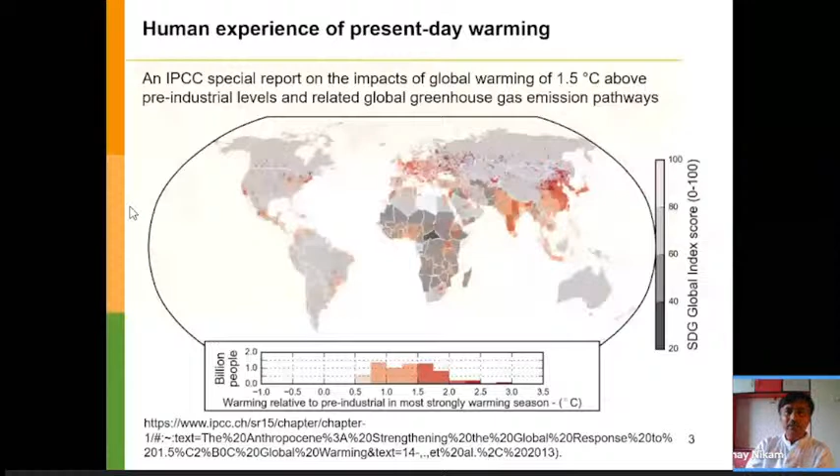So, in a nutshell, there is an increase in temperature because of global warming by 1.5 degrees Celsius, right? And this is an evaluation over the years from 1860 to 2020. Over a period of time the temperature is increasing because of greenhouse gas emissions. So, what are the possible mechanisms for urban-induced rainfall modifications? Because of climate change, we have witnessed an increased number of high intensity rainfall events. So why is this happening?

One is atmospheric destabilization through enhanced low level heating, commonly known as the urban heat island effect, which is prominently observed in urban areas and adjoining areas. Then increased low level convergence due to surface roughness, the modification of microphysical and dynamic processes, the modification of low level atmospheric moisture content, and pollution from automobiles and industry.

Even if you take the case of Mumbai, India, we have frequently seen cyclones happening on the east coast. Cyclones happen most prominently on the east coast. But now, for the last 2 years, we have seen cyclones happening even on the west coast. This is mainly because of climate change, because of the

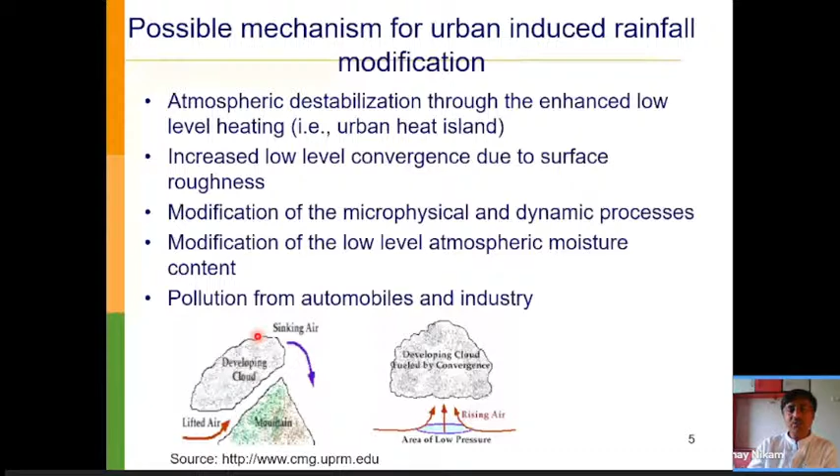rainfall effect, and because of the urban heat island effect, high intensity rainfall has been observed not only in the city area but in areas adjoining the cities. Now, what is happening because of the urban heat island effect? Earlier there was a huge difference between day and night temperatures, maybe in the tune of 5, 7 or 8 degrees. Now the difference has been getting reduced because of the urban heat island effect.

I've done some studies where I've checked the Mumbai temperature and the Delhi temperature. We have seen that the earlier difference was 8 degrees Celsius. Now it is only 4 degrees Celsius. That's why we feel very uncomfortable even at 10 p.m., 11 p.m., 12 p.m. in the night. After 12 p.m. the difference increases, but up to 12 p.m. the difference between day and night temperatures is much less. That's why we feel a very uncomfortable scenario. Same is the case of Shanghai.

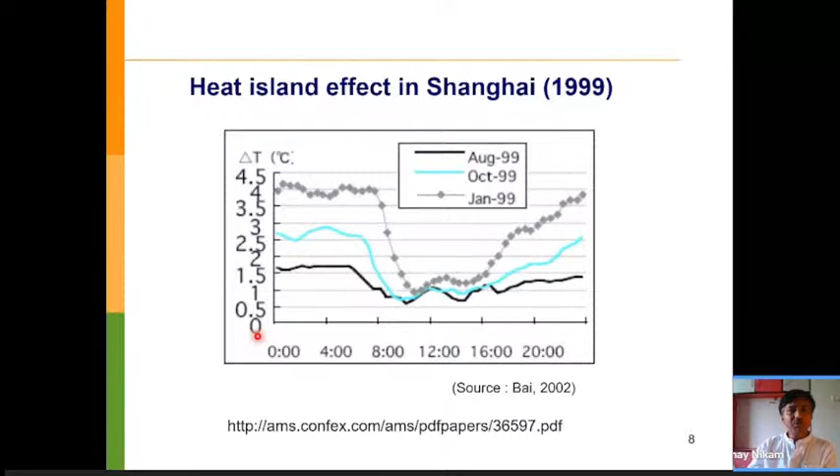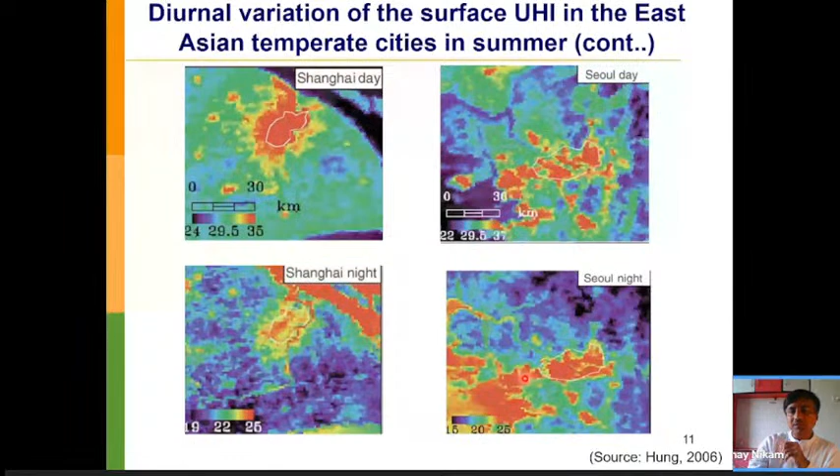Then the impacts of climate change are two. The first is very short term, very high intensity rainfall. And another is sea level rise. There is a lot of news that sea level rise will happen, and even in Mumbai there will be a lot of sea level rise. This has been documented in the IPCC Sixth Assessment Report, AR6, which was very recently published, last year itself.

There is a very good website where they have given, at various locations of the world, what the sea level rise will be. If anyone wants to understand the sea level rise for different scenarios, they have worked it out for different scenarios. For example, SSP3-7.0, SSP5-8.5, with low confidence, with high confidence, what is the average. The image below shows all scenarios.

If you see the most possible scenario for Mumbai, that's Apollo Bandar, they have estimated the sea level rise will be 0.58 meter, which is very alarming. Whether it will really happen, let's see, because this 0.58 is after 100 years. There are several estimates by NEERI as well. Even in the last report, AR5, they also gave some estimates of what the sea level rise will be.

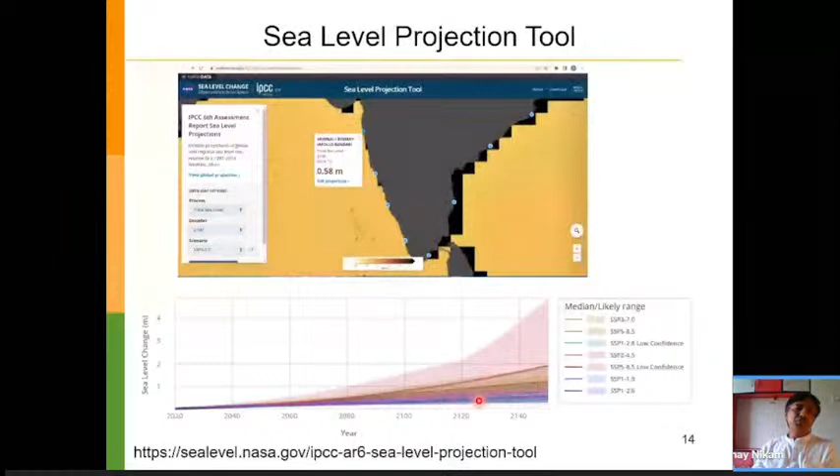So this, if you remember, this figure is 0.58. It is a recent figure of the AR6. And if you refer to the CPHEEO manual, for your information, before 2019 there was no dedicated stormwater drain manual. But in 2019, a separate manual was published, especially for the design of stormwater drains. Earlier there were only 5 to 6 pages covered in the sewerage manual, which we used for the design of stormwater drains.

And in this new manual, they have specifically mentioned what the sea level rise will be. They have mentioned that the sea level rise will be between 3 centimeters and 10 centimeters per decade. It means for the 100 years period, it is 30 centimeters to 100 centimeters, right? So it is varying from 0.3 to 1 meter. This is basically based on the AR5, the earlier reports, right?

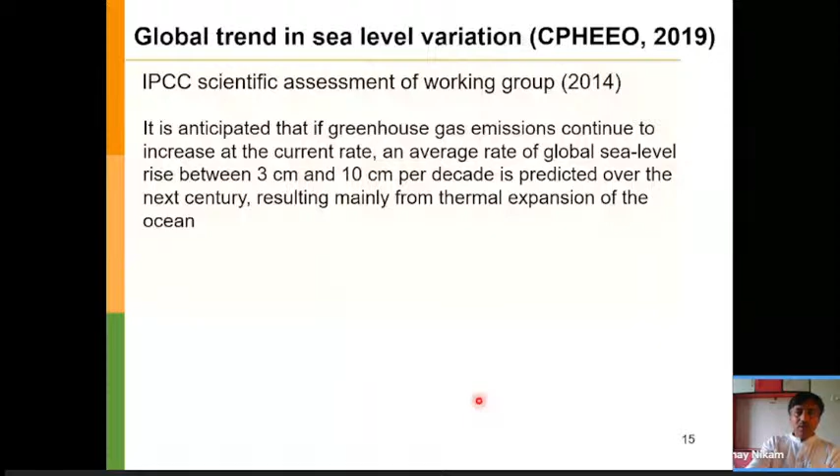I'm referring to the manual because the manual has given the earlier IPCC reports' findings, right? Now the present figure is much more, it is double compared to the earlier one. But for planning per se, we have to follow the CPHEEO manual, and one should understand what has been mentioned in it, because from my field experience, many practitioners don't even know a CPHEEO manual exists, right? So this is the state of art. That's why I'm clearly specifying that the CPHEEO manual is there for the design of the

stormwater drain, where they have specifically mentioned that the rise in mean sea level along the Bay of Bengal will be 1.92 millimeters per year, right? And as far as the Arabian Sea is concerned, it is 1.72 millimeters per year. If you multiply by 100, that gives the rise after 100 years. So these numbers we have to consider for designing coastal cities.

They have also given a very nice table mentioning that for the effect of climate change, we have to consider a rise in sea level of 0.3. So mind it, when we are designing the coastal stormwater drains for coastal cities, we have to take this 0.3 rise in sea level, and accordingly design not only the drain invert levels but also the formation levels of the plot. At the end, I'll be covering some case studies, so we will understand how to consider the impact of climate change. So these are the recommendations of the CPHEEO manual.

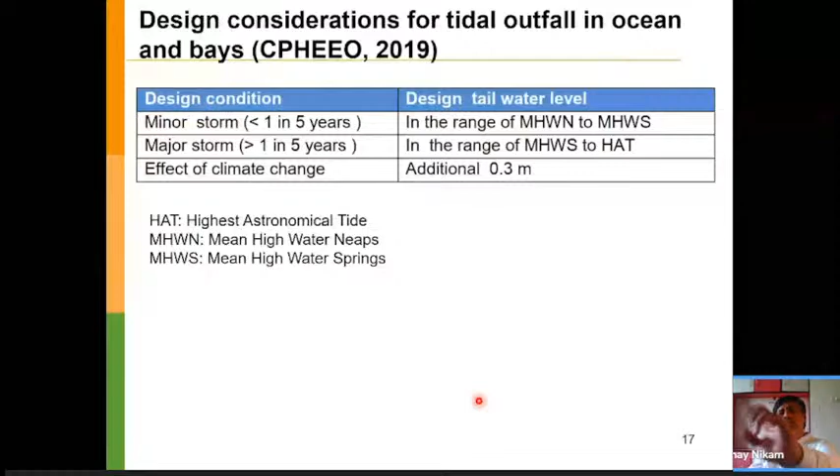And let's understand the urban definitions. This definition is given by the Ministry of Urban Development: towns having a population of 5,000 to 20,000 are designated as small towns. Small town 2 is 20,000 to 50,000. Medium towns are again classified into medium town 1 and 2 based on population. Metropolitan cities are defined as having a population of 10 lakhs to 50 lakhs, and metropolitan 2 cities, 50 lakhs to 1 crore. And the megapolis is more than 1 crore. So this is the definition of urban settlements.

If you see, even from the flight, you can see Chennai, there are a lot of waterlogged areas, and this is because of the low-lying areas. There are several low-lying areas. Bangalore, there are several lakes which have now been converted for habitation. By Bangalore, or even Hyderabad, there used to be so many lakes.

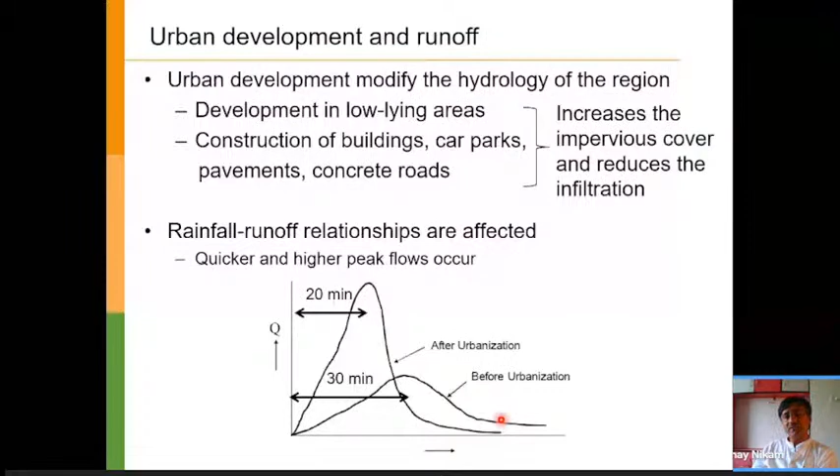Let's understand the various factors affecting flooding. One is extreme rainfall, which is happening - that's the meteorological factor. Take the case of 26 July 2005, there was 944 millimeters of rainfall in a single day, and 190 millimeters of rainfall in just 1 hour. It's very extreme - that is called a very, very extreme event.

Then cyclonic storms, climate change - the impact is short duration, high intensity rainfall. Then another hydrological factor such as high tide impeding the drainage.

What is happening in the coastal areas? What is happening in Mumbai? What is happening in Chennai or other coastal areas? Whenever there is high intensity rainfall, and if it coincides with a high tide, flooding happens, so waterlogging happens in the city area. So Mumbai is working in that direction, on how the impact can be reduced.

Then the absence of drain networks - in some places there is absolutely no drain network. I have been to Hyderabad very recently, in the last 15 days, in a very big IT area, and I was surprised there is no drain network. Even the new areas in Hyderabad, Cyberabad, there is no roadside drain network. So in that case, what will happen? Roads will act as a drain.

Long back in an international conference, one of our partners from Europe said that there also the roads are acting as a drain. That was okay for them because their rainfall is not much, so it's allowed for roads to act as a drain. But can we afford that in India? Because here we receive very high rainfall, during the monsoon period we can't afford our roads acting as a drain. But this is what is happening - that's why you see 1 feet, 1.5 feet, or 9 inches of water on the roads, because of the absence of drain networks.

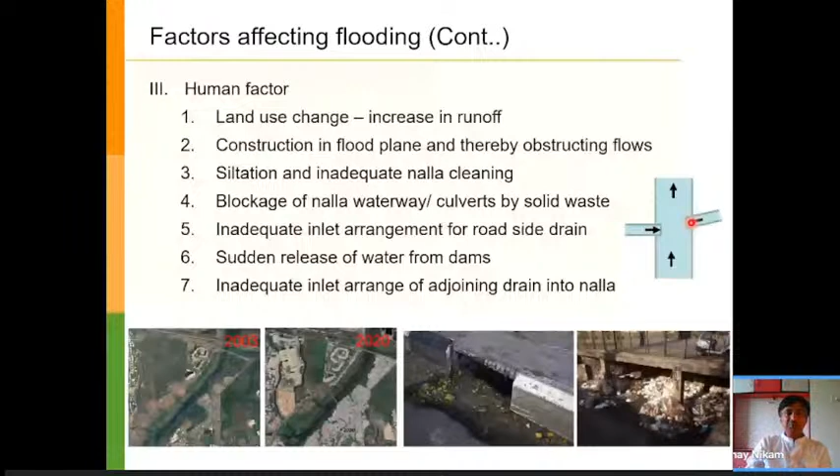So let's understand the design factors now, because many of the urban stormwater drains have been designed using the old CPHEEO manual.

For your information, under the AMRUT projects and the Jawaharlal Nehru National Urban Renewal Mission projects, from year 2006 to 2011, in many cities, stormwater drains were constructed based on the CPHEEO manual. Even after that, in the last 5 years under the AMRUT mission, stormwater drains have also been designed based on the old CPHEEO manual.

Why am I referring to all this? Because you should be aware why urban areas are getting flooded. The next part is climate change, of course. But apart from climate change, because of improper design, flooding is happening, and climate change is adding to it.

Then there's the lower return period. In the old CPHEEO manual, it was mentioned that the return period should be 1 in 2 years. What does 1 in 2 years mean? It means you are allowing flooding once in 2 years. But as per the present manual, it has been revised to 1 in 5 years, and it should be at least 1 in 5 years.

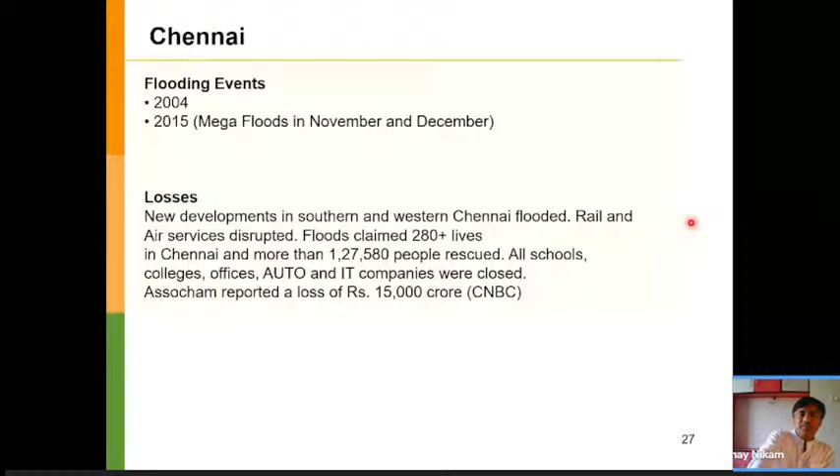In Chennai 2015, mega floods were witnessed in November and December, especially December 3rd to 5th. In Bengaluru, severe flooding happened in 2005 - 525 millimeters in 24 hours. That's huge, and this is one of the reasons attributed to climate change. It also happened in 2009, 2013, and 2016. So every place is impacted.

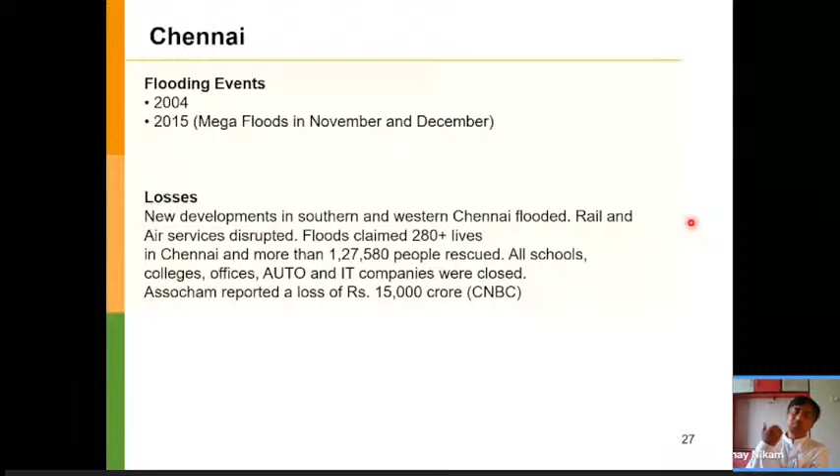Again, myself and my professor used to discuss this several times at IIT Bombay - what is happening?

The open drains are now acting as a combined sewer, right? So it's the case of Mumbai, or everywhere, the channels are acting as a disposal for the sewer line. So it's basically a combined system. And during the monsoon, what is happening?

During the monsoon, we do open the sewer lines. It is a very common practice in Mumbai, right? So we open the manhole of the sewer line and allow the rainwater to enter into the sewers. And finally, where will it go? It will go to the pumping station and STP. So this is something of an ulta case which is happening. We are converting the open channels into sewers, and during the monsoon, we are converting the sewer line into stormwater drains.

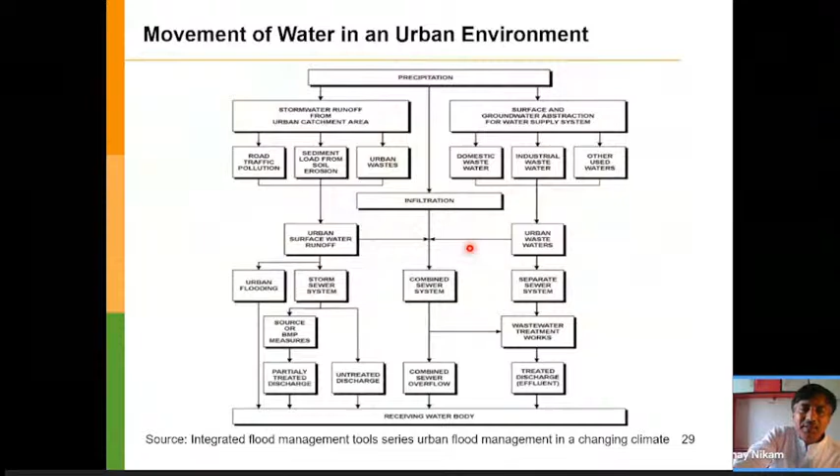Because of climate change there is high intensity rainfall, and there will be a rise in sea level affecting the tides. So yes, both things are understood, but how to incorporate them? Most of the time designers forget the time of concentration, and even if they understand it properly, they make mistakes in the designs. Let's understand how they make mistakes, because of course we learn from mistakes, but mistakes should not be repeated. That's the main thing.

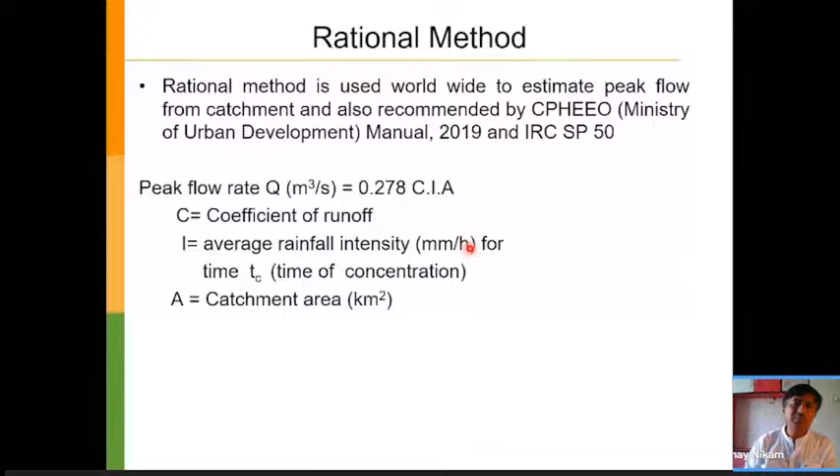Why? Even the Thane Municipal Corporation recommends the coefficient of runoff should be 1, not only for the paved areas but also for the garden areas. Why? Because once the soil is saturated, everything is runoff. It will not absorb much. So in case of the peak, everything will get converted into runoff. So it is advisable to adopt the maximum coefficient of runoff, which is 1.

But this is a provision of the present CPHEEO manual, which is published in the year 2019. So the designs after 2019 will follow this coefficient of runoff, right? But in the earlier manual, the coefficient of runoff used to vary with the time of concentration.

Now I would like to explain here, because the coefficient of runoff is a function of the surface area. That I think is clear, right? So if this is your ground, a totally paved area, the coefficient of runoff is a property of this particular ground or top surface. Will it vary with the time of concentration? No, it can't vary, right? Because it will remain the same.

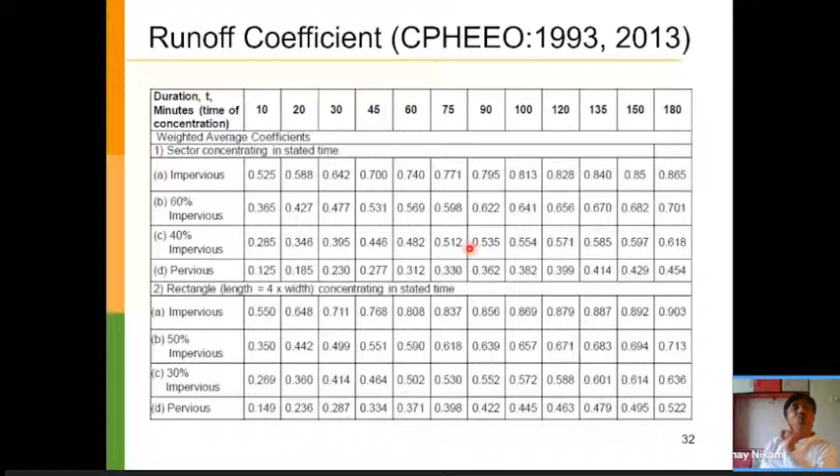But this was specified in the earlier CPHEEO manual: with varying time of concentration, the coefficient of runoff will change. And mind it, with this design methodology, all stormwater drains in the urban areas have been designed. So now you must be wondering why this flooding is happening. This is one of the main reasons, because they have designed for a lower coefficient of runoff considering the time of concentration. This I will explain here.

So in any particular area, the duration is the time of concentration. If it's 180, then the coefficient of runoff is 0.85. But at some places, if the time of concentration is 30, the coefficient of runoff is 0.65. This is not a practical case, right? Practically, if this soil is a paved area, it will remain 0.9. It will not vary with the time of concentration, right? But all the designs have been done with this concept. So basically they are under-designed.

And I have put a lot of effort into understanding where this has come from, because my professor was on the committee of the CPHEEO manual. He was the committee member for chapters 3 and 5 of the CPHEEO manual, and we went through so many manuals, so much literature. We wanted to remove this table from the CPHEEO manual, because it was included earlier and the CPHEEO people wanted to include it in this manual as well. But we said no, this is a very wrong concept and this has to be removed.

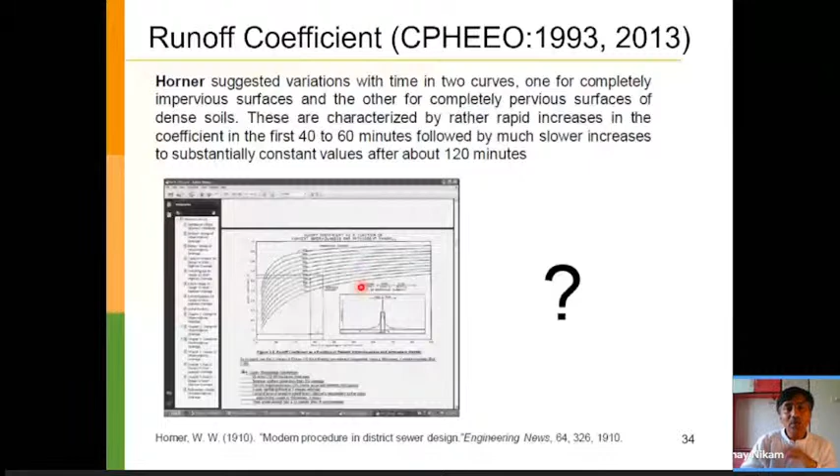So we actually made a lot of searches for where this figure came from. Basically, there's Horner. Horner is a scientist who carried out some experiments in 1910, also for non-urbanized areas, that is agricultural areas, where he developed some formulas and correlations and mentioned that the coefficient of runoff is a function of the time of concentration. This table was then adopted by the FHWA manual in August 1979. Then from the FHWA manual, we adopted it in our earlier 1993 manual. But in 2009, FHWA deleted this table.

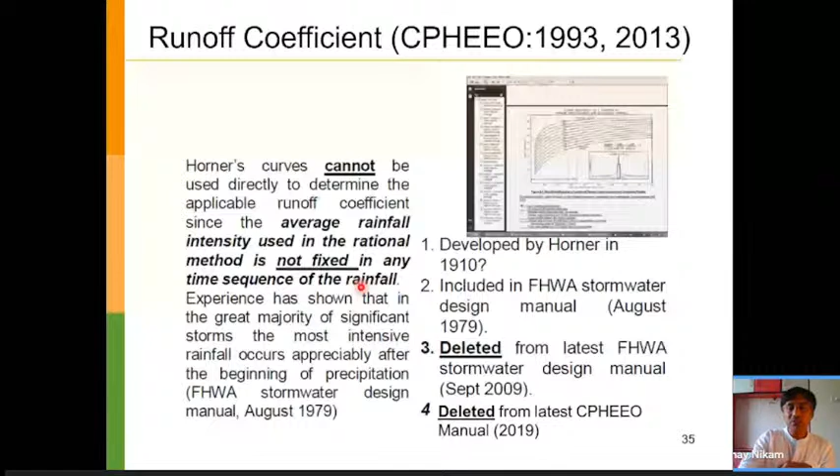And now, after convincing in several meetings, it has been removed. So that's why now for the coefficient of runoff there is no Horner, and it's a function of the property of the soil itself. So this is one of the areas of Thane where the designs have been carried out using the earlier CPHEEO manual, because this was already constructed under the Jawaharlal Nehru National Urban Renewal Mission in 2009, 2010.

So if you go by that concept, if the time of concentration is 20 or 30, the coefficient of runoff was 0.5, even if it's a paved area. Mind it, even if it's a paved area. And at the same time, as we proceed along the chainage, the time of concentration again is a function of the length, right?

So mind it, if it's the upstream side, at chainage zero, the coefficient of runoff of the same unpaved area is 0.4, and if it's at the chainage on the downstream side, at 5,000 meters, for the same unpaved area the coefficient of runoff is 0.6. So that is the problem, right?

Because of this varying coefficient of runoff for the same type of soil or same plant cover, the stormwater drain has been under-designed. Okay, so this explains why you frequently observe flooding in urban areas in spite of new construction of drains, right? This is because of the wrong design approach.

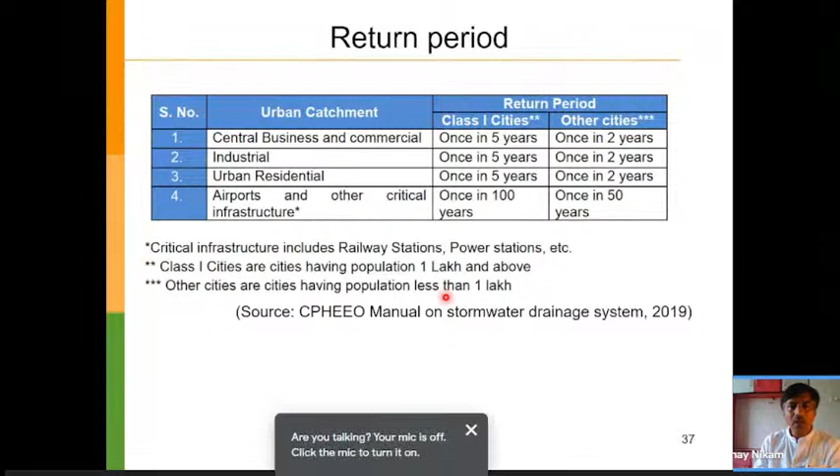and the major systems are 1 in 50 or 1 in 100 years. Japan is 1 in 10 years. So that's the main thing. That's why the professors try to push up. At least we should adopt 1 in 5 years, and that's what's been adopted in the CPHEEO manual.

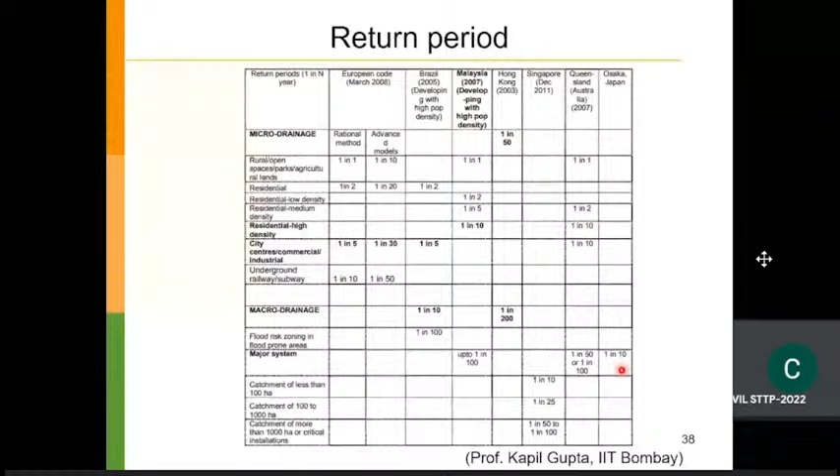Okay, so accordingly, I have been involved in flood risk assessment of various data centers. These data centers are very crucial, right? Because of the foreign funding and foreign investors of data centers in India, they insist that the risk assessment should be carried out for 1 in 100 years.

So in that case, I've been doing this for many metro cities where the surrounding stormwater drain systems have been designed for 1 in 5 years or 1 in 2 years, right? But we have to design the internal system. We have to do the assessment for 1 in 100 years plus climate change plus tidal consideration, and for that we have to take measures, right?

So this is time of concentration. Then another lacuna in the old formula. Even now, I have seen some designs where they have adopted a very improper formula for estimation of the time of concentration. The time of concentration has two components: the inlet time and the time of flow.

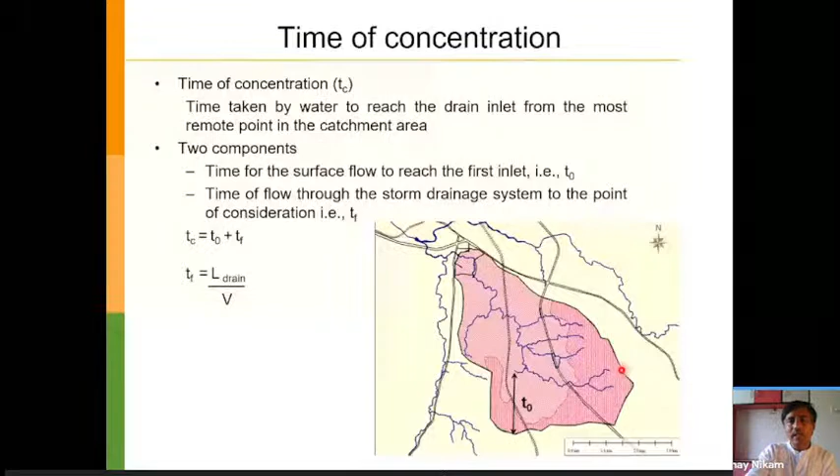The time of flow is through the drain channel, and the initial inlet time is the initial time required for the stormwater runoff to reach into the drain. Now, this inlet time has been changing over time. For example, in the top case, the inlet time is much more.

Okay, and that's why we use the most famous formula, the Kirpich formula. And what formula should be used in the case of developed places, townships and all? That's again a question. Because if you see here, in the pre-development scenario the time of concentration is 60 and the rainfall intensity is 50. And because of the development, the time of concentration is 30, and now the rainfall intensity is 70.

So is it appropriate to use the same formula, the Kirpich formula, which has been used for several years? Why I'm mentioning all these things is because in academics we do teach and follow this formula, right?

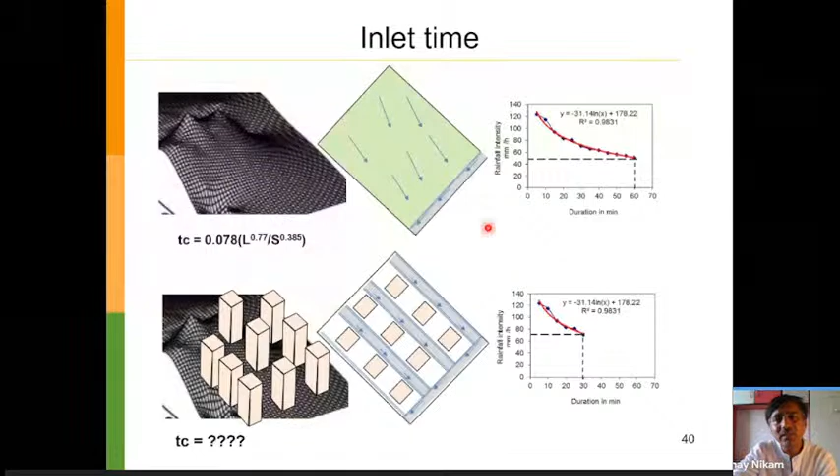So this is a very old Kirpich formula, and then for the urban area, they have suggested some constant, multiplying factors, and it has been mentioned in very few books. I've seen it only in a vintage book. Okay, so actually it has to be reduced, right? So this is a proper formula, because this is a function of the length and the slope. Then we searched for other formulas.

We have done a lot of research on which formula should be used for estimation of the inlet time. Then we found one good formula in a Federal Aviation Administration manual, a US manual, which has been used for the design of airport pavements, right. This particular formula is a function of the coefficient of runoff, the length, and the slope. So this coefficient of runoff is very important while estimating the inlet time.

So the CPHEEO manual has adopted this particular formula, and now all the new designs have to use this particular formula. Mind it, when we are teaching our students, we have to teach based on this particular formula. Otherwise, if the students are not aware of this formula, if they are not aware of the CPHEEO manual, then they will make the same mistake which has been made by our past designers, right?

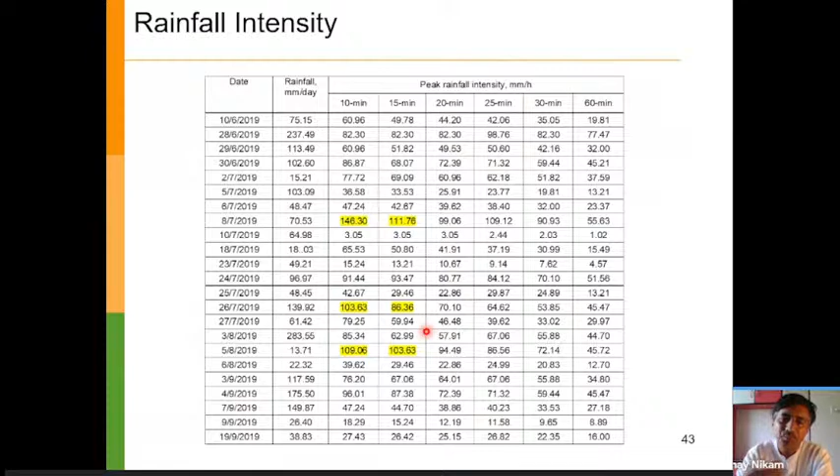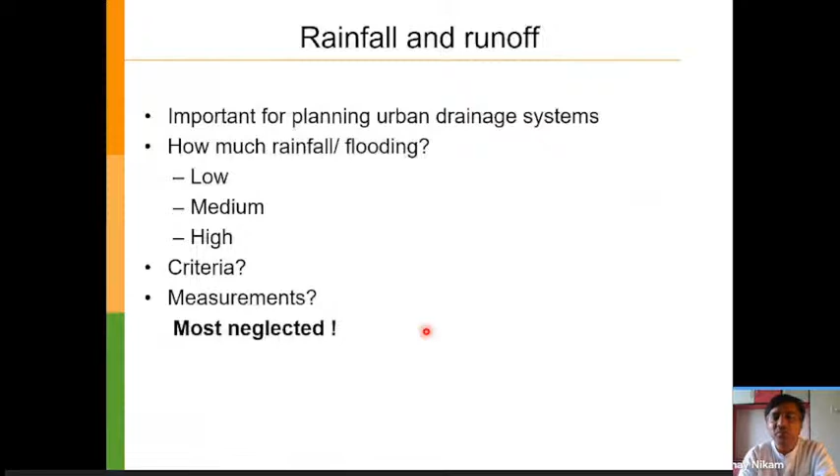So for rainfall and runoff, what is important for planning the urban drainage system is how much rainfall and flooding should be considered, then what are the criteria and measurements. In most cities, the measurements of the rainfall are neglected. Now let's understand. Okay, all the drains have been under designed, right? Now we have to suggest the mitigation measures. So mitigation measures are both structural mitigation measures and non-structural mitigation measures.

Now the structural mitigation measures are the cleaning of the nala, then the cleaning of the drain inlets, the provision of adequate drain inlets, widening of the culverts, widening of the proposed nala and the tidal ingress areas. This we have carried out for one particular nala in Thane. The study has been carried out.

So we understood that the earlier drains are not designed for the tidal ingress, right? And at the same time, they're under-designed because of the wrong adoption of the coefficient of runoff and the lesser intensity because of the lesser return period, right? So what we did, the lower part, the end part, we have widened the downstream part of the nala, considering the flows from the tide. So we have done the modeling, and accordingly the width of the channel has been widened.

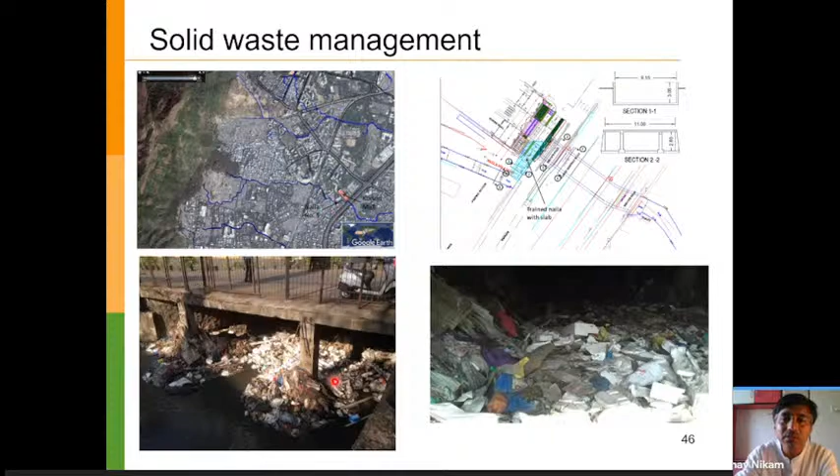So if you see the figure, there's a lot of solid waste disposal under the culvert, below the culvert. So we have actually studied and worked out how much is the catchment area contributing to this particular culvert.

So this is the location of the culvert, and we have modeled this using HEC-RAS. I personally like HEC-RAS because it's a very good software developed by the US Army Corps of Engineers, and it's worldwide accepted software. I've been using it for the last 10 years for various projects. So this particular stretch was modeled using HEC-RAS.

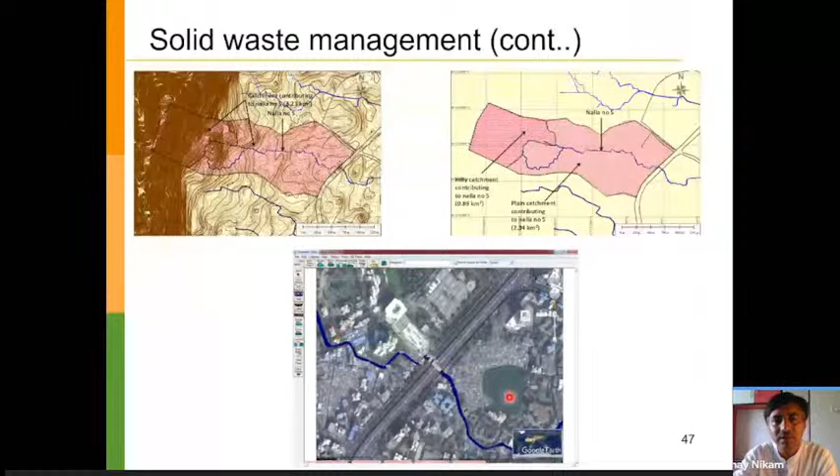This is the upstream side, and the water is flowing from right to left, and this is a blockage below the culvert. Because of the blockage, there is a rise in water level on the upstream areas. So this has been modeled to show how much rise there will be in water level.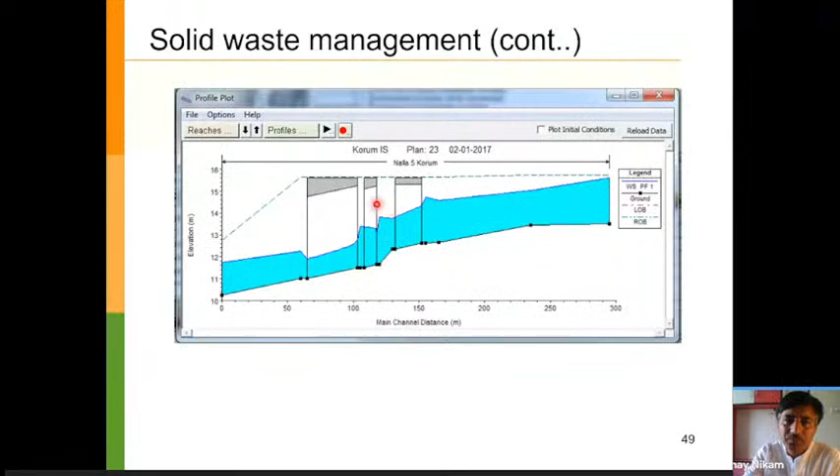So as a mitigation measure, we have to prevent the stormwater ingress of solid waste into the channel. So this is how we can provide screens inside the channel, so that all the solid waste will not enter into the drain - this screen will take care of the solid waste.

So this drain system, this screen system, has been designed by myself for one of the nalas in Thane. After the installation of the screens, a lot of the entry of solid waste into the drain has been reduced.

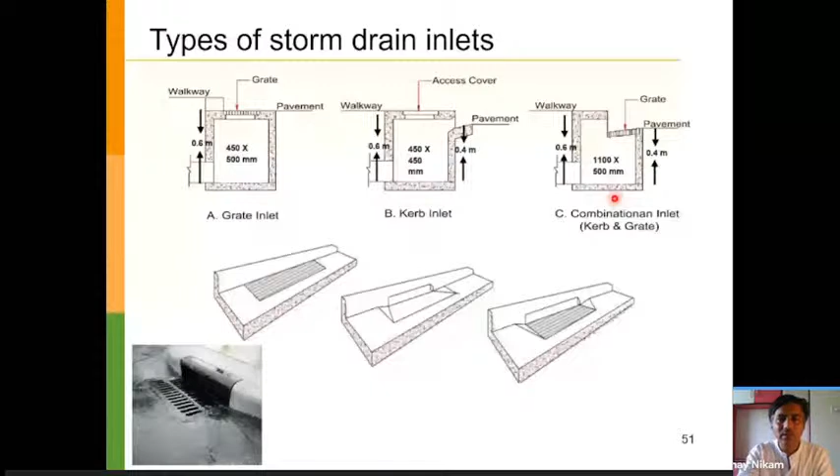And then another important aspect is the type of stormwater drain inlets - what should be the design of the inlet. Then the management of the pre and post development runoff from the disposal from the site.

Now this is one case from Mumbai, where the Mumbai drains have already been designed for 55 millimeter per hour. This is a very special case where this is basically an SRA project. Earlier there was a lot of open area, and the pre-development runoff was not much, but after the development, because of the paved area, a lot of runoff has happened. So we do understand that this increased runoff is because of the post-development, but the external drains are not adequate to carry the runoff from this proposed development.

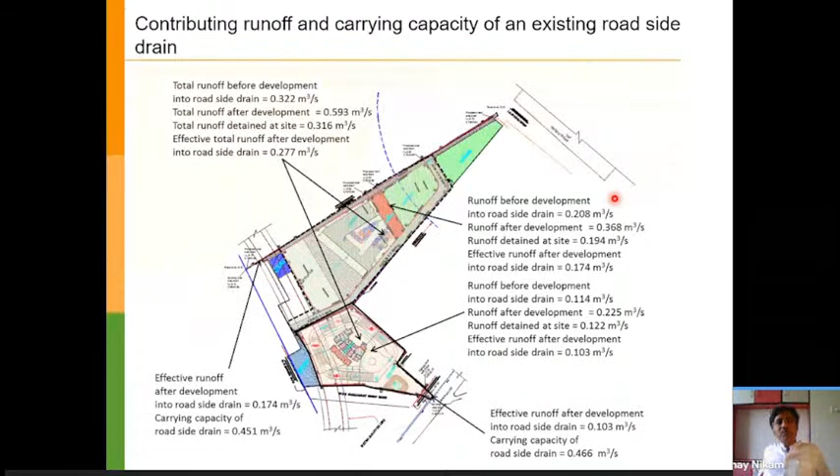Then what should be done? For that particular project, the plot has been divided into sale and rehab. So the runoff from the sale component is collected in the collection tank, then the infiltration pit, and the remaining will go to the roadside drain. Then even from the rehab plot, rainwater will be collected in the infiltration pit and collection tank.

By this, before development, runoff was 0.322 cubic meter per second, but after development the runoff is detained inside, and therefore there will be less impact on the roadside drain. So this kind of study we have to do when there is any new development happening in urban areas.

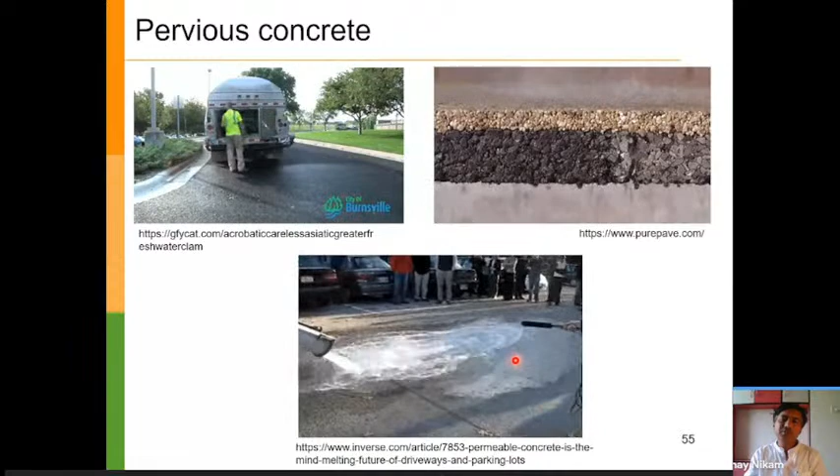Now if you understand there is high intensity rainfall because of climate change, and your drains are not designed for that, then what should be done? In case of the Mumbai nalas, they are designed for 55 millimeter per hour, and even the stormwater drains in Thane are designed for 50 or 75. Once you understand that the external drains are not adequate to carry the runoff generated because of high intensity rainfall, then in that case you can suggest...

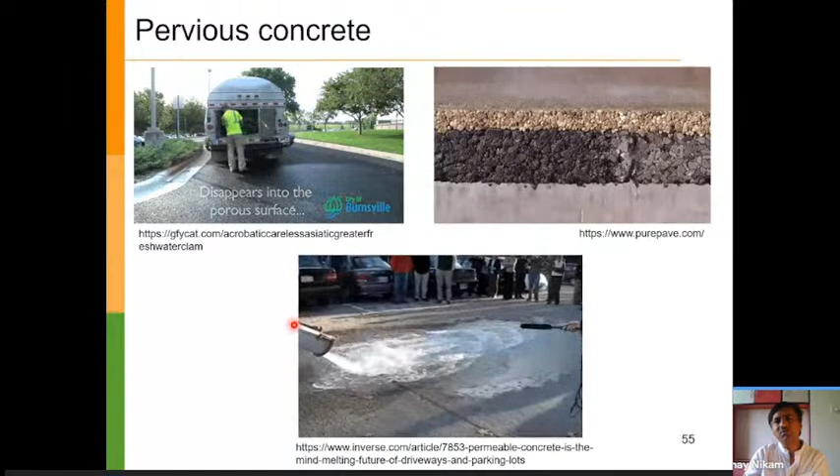...pervious concrete. So this is a very nice image of pervious concrete. The water will get infiltrated in the soil, and there will be less runoff disposal from the plot to the external stormwater drain.

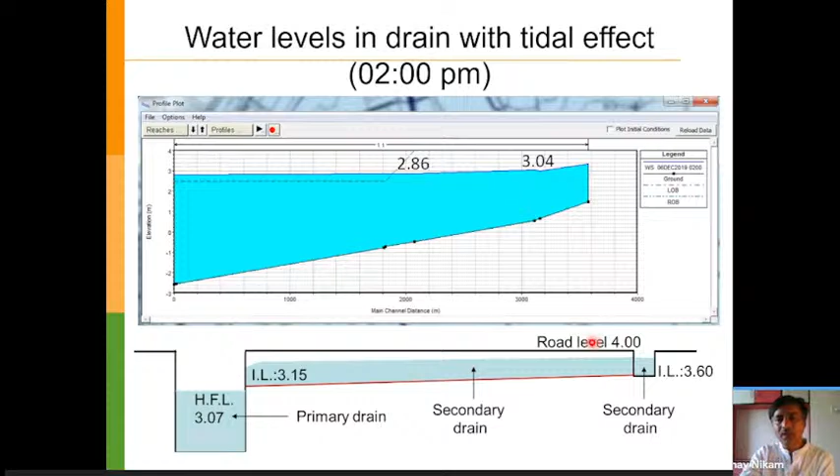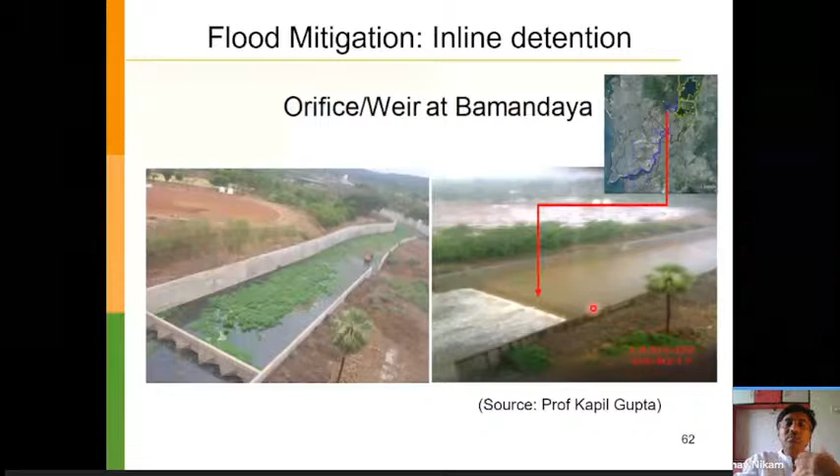So this kind of system, if we implement wherever it is possible, this will help in reducing the peak runoff.

Then this is another case which I have studied for one of the areas in the Konkan areas, the Alibag area. This is one plot which is an open plot basically, and there is an existing tidal gate located here. It has been seen that all these villages close to the plot and adjoining areas used to get flooded every year, and there was a lot of complaints.

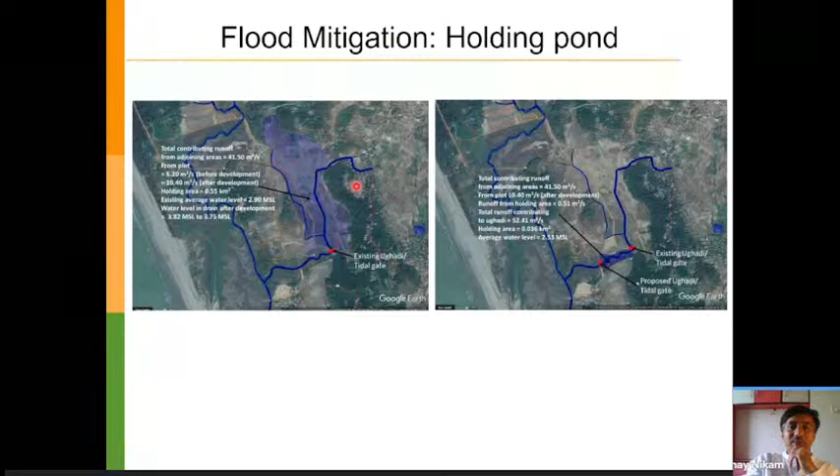So we did the hydraulic modeling of this entire area, with the climate change impact of course. This is one big plot, and this is the existing tidal gate.

Because of the tidal gate, this entire area was acting as a holding area, but there was a rise in water level, and because of this rise in water level, it was entering into the adjoining villages, and there was a lot of complaints. Then we studied and identified the different tidal gate - this is how we have to do it.

By identifying the different tidal gate locations, there is a possibility of different tidal gate placements. This particular area is acting as an additional holding area, and because of this, there is a drastic reduction in the water level. It has also absorbed the sea level rise. So this is with the existing tidal gate, and this is with a new tidal gate and with the additional holding areas. This is how the holding areas have to be designed.

Then the coastal flood mapping and mitigation - why coastal floods? Because we have seen there will be a rise in sea level in the range of 0.3 to 1 meter. So we have to do coastal flood mapping and plan for mitigation measures.

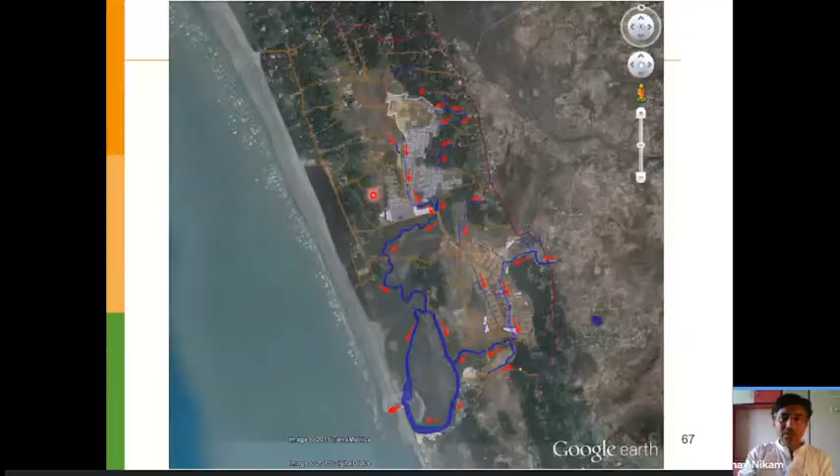Let's understand one case. There are two plots where we have studied the impact of climate change and the impact of tidal effects. Climate change includes both rise in rainfall intensity and tidal and sea level rise. I'm giving this example because this kind of study has to be done for any particular project. So we have identified the different drain networks, the stormwater drain networks.

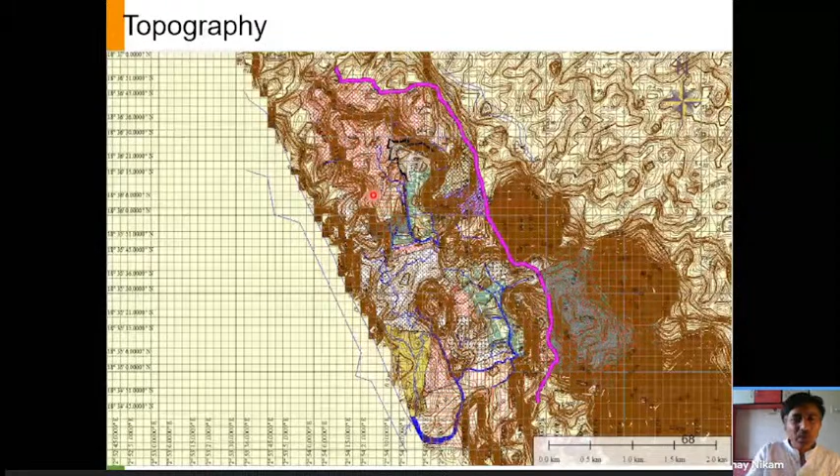We also studied the topography of the area and the adjoining areas, and the various catchment and sub-catchment areas which are contributing to the stormwater drain, and the secondary and primary drain.

Then the tidal data - we have to select the tidal data. One can have observed tidal data, and there are tidal gates. The Maharashtra Maritime Board publishes tide level data, so one can procure it from the Mumbai Port Trust, as the Maharashtra Maritime Board publishes tidal data.

For your information, I would like to explain this again, because there is a huge gap in understanding. All the tidal data are with reference to the chart datum. So whatever tidal levels are mentioned are with reference to the chart datum - mind it, it is not with reference to the mean sea level. This is where engineers make mistakes. Even government officers make this mistake.

On the very first back side of the page, it is mentioned that these levels are with reference to the chart datum, yet everyone is under the impression that these levels are with reference to the mean sea level. No, this is not correct - there is a difference between the chart datum levels and the mean sea level. So it is the duty and responsibility of the designers that it has to be converted - the chart datum information has to be converted into the mean sea level.

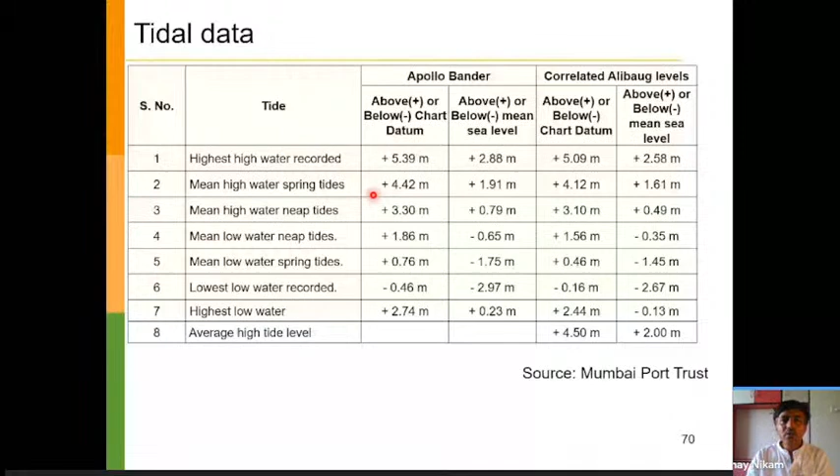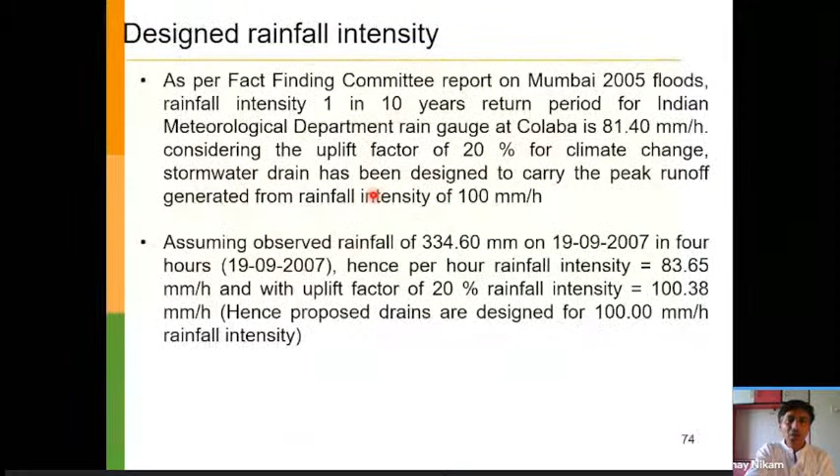Then again we have to understand the daily maximum rainfall for any particular area. Then of course short-term rainfall, that's the rainfall intensity for the time of concentration of 10 minutes or 15 minutes or 30 minutes we have to understand. And then we have to do the design, right? So this is a catchment contributing to the stormwater drain.

Then we have actually understood the plot topography. So this is the pre-development scenario. Then this is a 3D view of the plot, and then again we have estimated water spread. That's a high tide level of 2 meters MSL and a rainfall intensity of 100 millimeters per hour, and the simulated water level is 2.95. Okay, so this is a plot, and this is what will be the water level in the plot.

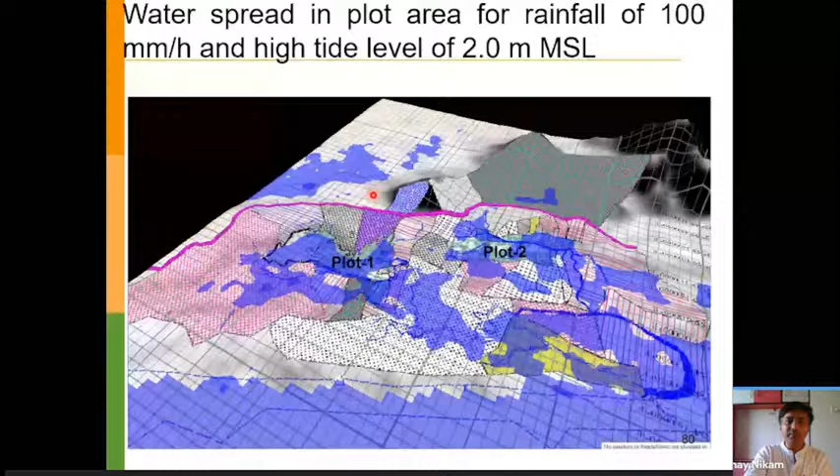Okay, and one thing is much more important, that whatever the model gives has to be calibrated. The model has to be calibrated, and of course when we carried out this study, the model was calibrated with a known observed one. Then this is the plot topography post development, and if you see here, this is pre-development, and the right hand side is post development.

So we have to understand the present topography, and how the plot will change. And of course, why we do all this study: because if there is a particular development in the plot, if we are elevating the plot. Okay, understood. Now if there is a climate change impact, if the sea level rises, okay, I'm raising my plot, but what about the adjoining area plot, right? So we have to take care of the adjoining areas as well, right?

Then we have to provide the internal stormwater drain accordingly, so that water from the adjoining areas can be taken care of, can be disposed of. So this is again a 3D view. This is pre-development and post development. Fine. So this is again a 3D schematic. So this is how we should be planning, right?

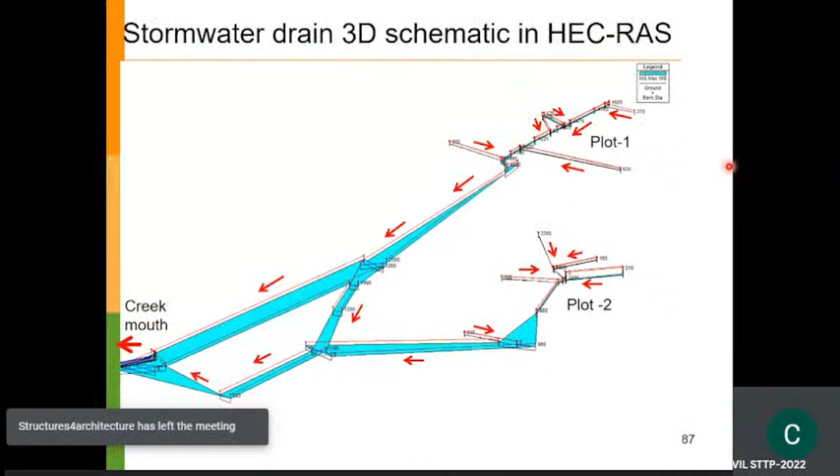This is how we should be doing it, rather than designing the stormwater drain in Excel spreadsheets, right? So we have to come out from the Excel spreadsheets. We have to actually train our engineers to do modeling like this, considering the tidal impact, considering the sea level rise impact. Okay. Then the plot formation levels. So based on this, we suggest the plot formation level.

Another thing is that, see, I have explained that there is a sea level rise. So accordingly, we have to consider what about climate change? What about high intensity rainfall? Right. So there is an international practice which we follow for our projects. As per the international practice for climate change, with respect to the intensity of the rainfall, we have to adopt a 20% uplift factor. What I mean to say is that we have to increase the rainfall intensity by 20%.

Okay, suppose for a 1 in 5 years return period, if the rainfall intensity is 100, then we have to adopt 20% more. That means we have to design our system for 120 millimeters per hour. This is what we are doing, right? Even in the case of Thane, for the time of concentration of 10 minutes. Let's see if there is somewhere. So I will explain this with this particular figure.

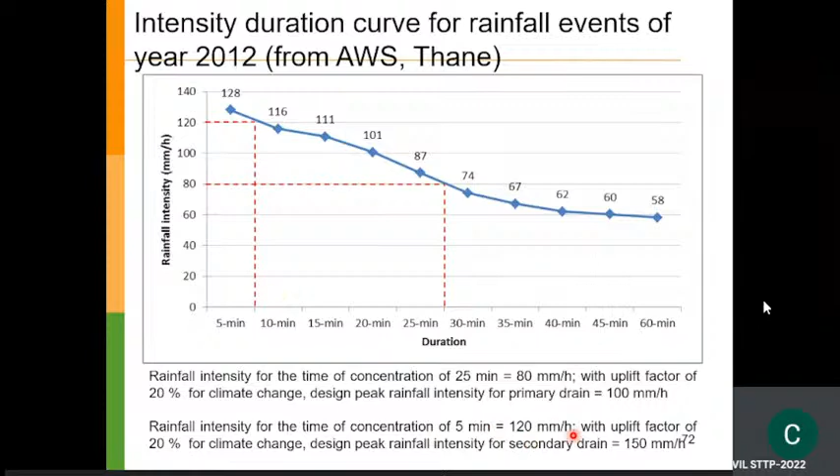So for the 5 minutes time of concentration, the rainfall intensity is 120 millimeters per hour. With the uplift factor of 20% for climate change, the design peak rainfall intensity becomes 144. So you can say it's 150 millimeters per hour. But if the time of concentration is 25 minutes, which is normally happening in urban areas, the rainfall intensity is around 80 millimeters per hour. With the uplift factor of 20%, the rainfall intensity becomes at least 100.

So urban areas should be designed for at least 100. When I talk about the urban area, this case is only for Mumbai, but at least it should be designed for 100 millimeters per hour. But again, there are certain new things. The 1 in 5 years return period intensity for Santacruz is 96.44. Then you can adopt 20% more. So what I'll recommend: for your own areas, you should try to find out the IDF curves, and accordingly you should increase the rainfall intensity for design purposes.

Okay. So let's understand the flood mitigation measures, the non-structural flood mitigation measures. Then these are the real-time rainfall monitoring and alert systems.

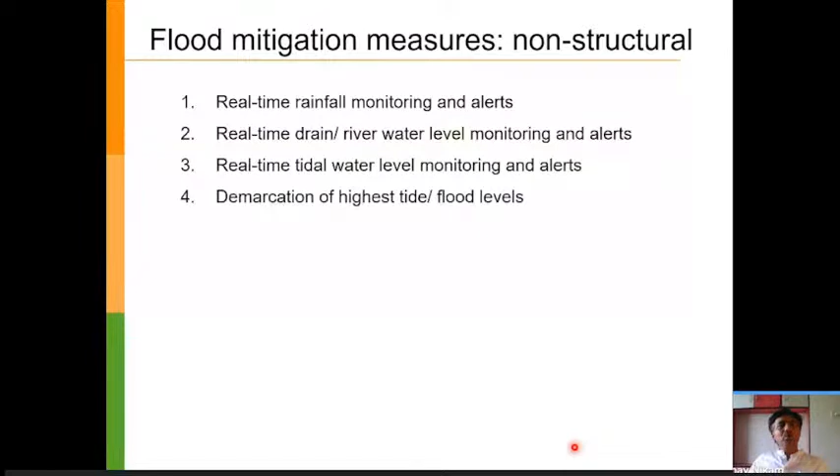So Mumbai, this real-time rainfall information: after 2005-2006, because of the initiative of Professor Kapil Gupta, Mumbai has installed rain gauges at several locations, which have been active since then. Even if you see the present Mumbai monsoon and the MCGM website, you will find real-time rainfall information on their website, where they provide the rainfall for the last 10 minutes, 15 minutes, 30 minutes, 1 hour. Okay. So this is what will be helpful.

And one thing they have done: since the Mumbai system has been designed for 50, they have set an alarm that if rainfall of 10 millimeters happens in 15 minutes, which is equivalent to 40 millimeters per hour, then they will send a message. Okay. So there will be an internal alert, and that alert will be sent to the disaster managers, the city managers, right? So this is one.

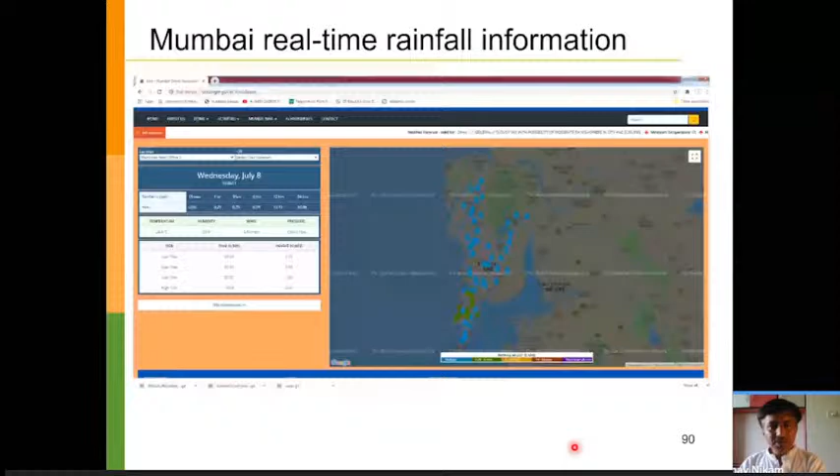Then, as a part of my PhD, I had developed a methodology for real-time flood warning systems. Okay, and this was actually implemented at that time itself when I was doing my PhD, implemented for Thane internally, and of course I studied the Mithi River, right? And there are two components: the model development and the model application.

Of course, when I am talking about real-time flood warning systems, it also includes real-time rainfall data, real-time rainfall monitoring, rainfall estimation, and forecasting. So for that, I used the SVM rainfall forecast model. I used the SVM tool for forecasting the rainfall, and with that forecasting tool it was possible to forecast rainfall 20 minutes ahead. This is one. Okay. And then the 20 minutes ahead rainfall forecast information can be made available from a rainfall forecast model, whether SVM, neural network, or any. But I have used the SVM. Okay.

Then for the rainfall runoff curves, I have used the recorded rainfall events and the catchment characteristics. Using the HEC-HMS software, we estimated the catchment runoff, and based on the catchment runoff, rainfall runoff curves were developed. And this simulated runoff was used as an input for HEC-RAS along with the river geometry, and the water levels were estimated. Okay, and based on the water level, the depth discharge curves were developed.

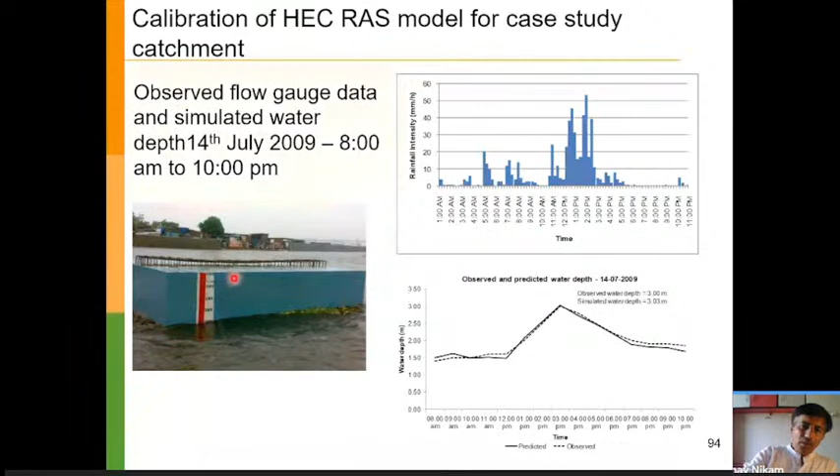And since the time of concentration is 30 minutes, and lead time for the rainfall was 20 minutes. So total the 30 minutes time of concentration. Time of concentration means 30 minutes ahead we can estimate the water levels. So this 30 minutes time of concentration lead time and 20 minutes lead time in the rainfall forecast. Total lead time was 50 minutes, and 5 minutes for processing the data. So 45 minutes lead time was available with this method.

Of course, this is a very short-term alert, but for the urban area, since the time of concentration is less, 30 minutes, this is really helpful in evacuation and relief. Okay.

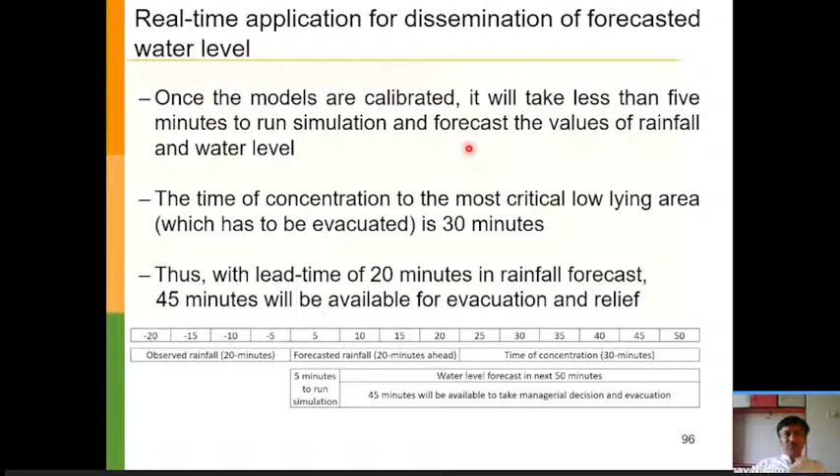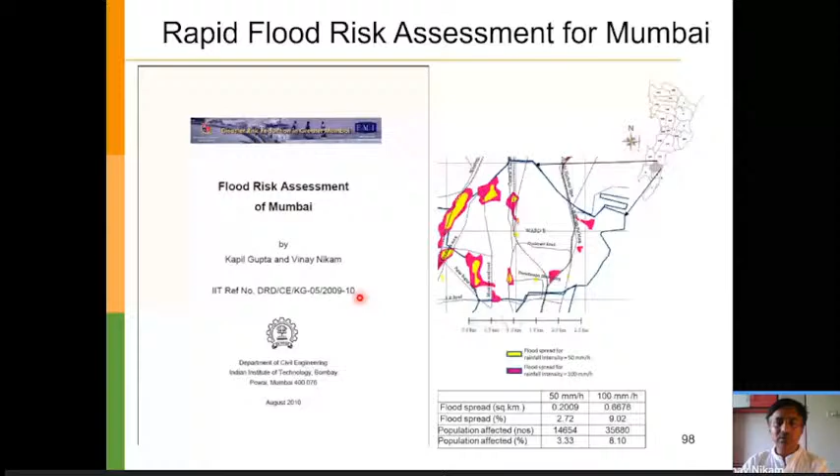Okay. Then the rapid flood risk assessment of Mumbai. I was involved in the rapid flood risk assessment, where we developed a flood spread map for rainfall intensities of 50 and 100 millimeters per hour. The objective of the study is that once you understand the flood spread and the population affected for the different rainfall intensities, it will help city managers and disaster managers to plan the mitigation plans and the rescue measures during the flood event.

Then based on my PhD research work and the real-time implementation at that time, based on the rain gauge which was installed on the rooftop of my building, we developed a real-time flood warning system for Thane, and it's online now.

Of course, it's not open to the public now, because this year they want to keep it for the city managers. Actually it was supposed to be made open for the public this year, but they have decided that for this year it will be for the city managers. From next year onwards, the real-time flood warning system will be open to the public.

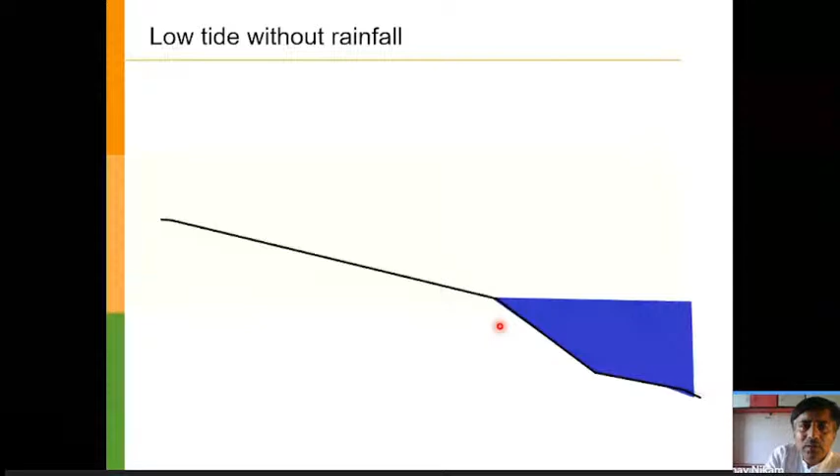And for simple understanding, this is low tide without rainfall. This is low tide with rainfall. This is high tide without rainfall, and this is high tide with rainfall. This is the impact, right? So we have studied the rainfall and the tidal analysis.

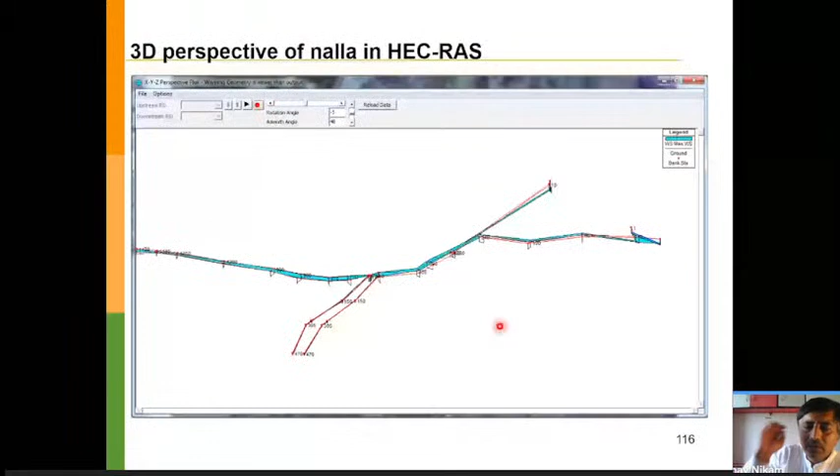But basically, when we are doing the real time flood forecast model, this is very site specific. It's very location specific. For an example, when we develop a real time flood forecast model for Mumbai, that is for the Mithi River, then we have also studied the overflows from the dam. That is a different scenario. That's without overflow, and there are two lakes, right? One is the Powai Lake and another is the Vihar Lake.

So one scenario is without overflow from the lakes, without tide. Then without overflow from the lakes and with tide. Then another scenario is overflow from the Powai Lake, because Powai Lake overflows when the annual rainfall is around 500 to 550 millimeter. After that Vihar Lake overflows, almost when the annual rainfall exceeds 1,000 or 1,100, depending upon how much the water level in the lake is. But these are rough figures.

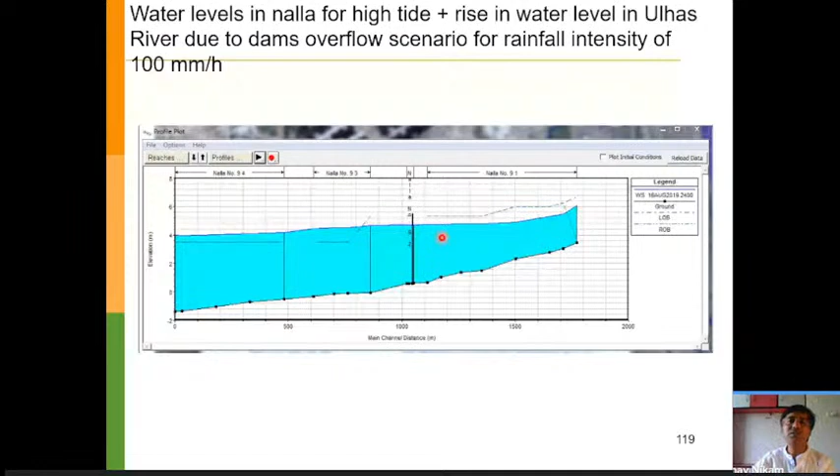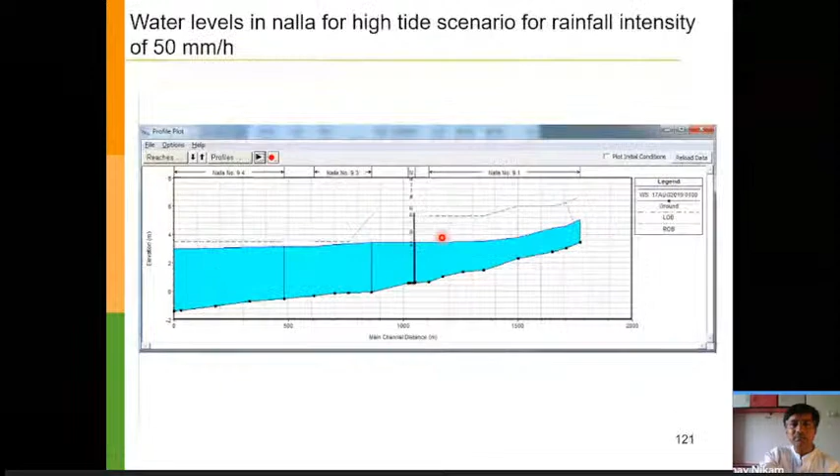Because this is upstream of the city boundary, to understand what the impact of the overflows of the dam in Ulhas River will be. And last year we actually monitored when there was flooding in Badlapur. In fact, I was traveling to the Konkan area, and I was live monitoring while traveling. During the afternoon, I saw a certain rise in water level and was surprised why this was happening. When we halted at one place, I saw the news that there was a lot of flooding happening in Badlapur.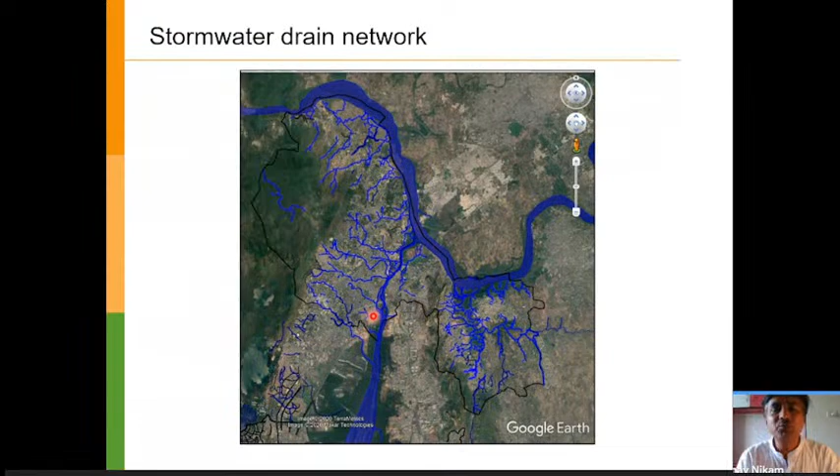But since it's costly, and every city wants a cost-effective solution, the real-time modeling part will be really helpful in estimation of the water levels. Okay, so that's what we did. The combination of the modeling, that's a forecasting system, and the existing live real-time water levels working. So this is

okay. So the water level information will be coming from the sensors on both the Ulhas River and Thane Creek, and the rainfall information will be coming from the real-time automatic weather stations. And this real-time information, along with the real-time water level or tidal information, will be helpful in forecasting the water levels. And then the forecasted water levels will be sent to the disaster manager.

Of course, we have set various levels of warnings based on the tide levels, based on the localized water levels, and at the same time, if the rainfall exceeds 12.5 millimeters in 15 minutes, we do send the alerts. That is, if the rainfall exceeds 50 millimeters per hour. So this kind of rainfall alert system and water level alert system has been developed for Mumbai, for Thane, which is active and online, but not for the public, for the city managers.

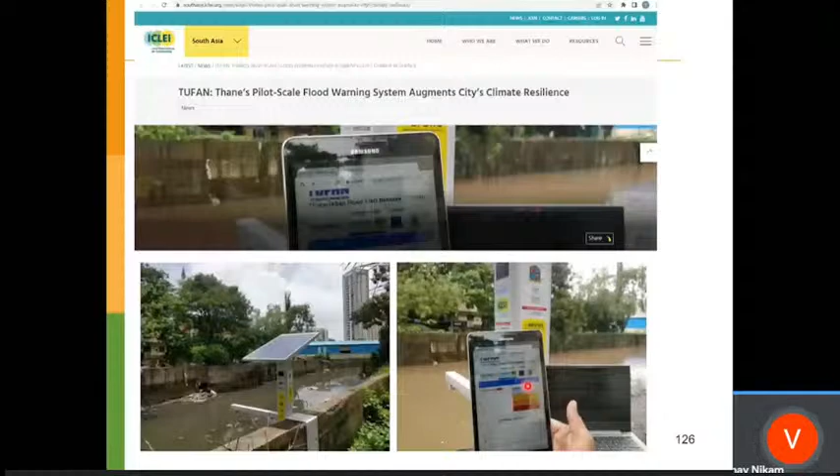And this particular project was sponsored by ICLEI. It was sponsored by UN Habitat and the European Union. Right. So this was a sponsored project, and this, my product, my baby, we have given the name TUFAN. It's the Thane Urban Flood Alert Network. So that's TUFAN.

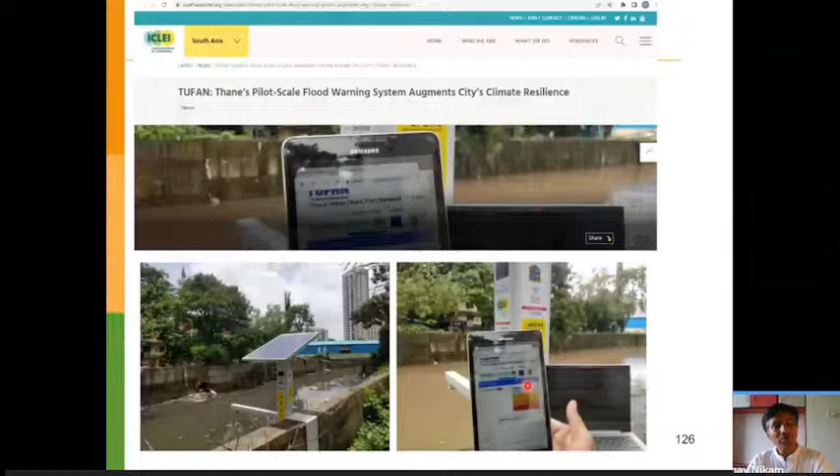And this model was developed as part of the study carried out by ICLEI to make the city climate resilient. So it is the best pilot study, and this has been recognized at various levels. It is one of the steps for making the city climate resilient, because once you know the impact of the flooding, you can plan, and you can estimate the high impact of the rainfall. Okay. Then this is the Barcelona detention pond.

Each tank controls a specific area of water catchment and regulates its flow toward the area that it serves. The regulating tank at the Escuela Industrial lies beneath a football field. It has a total storage capacity of 35,000 cubic meters, the equivalent of 10 Olympic-sized swimming pools. With a rectangular ground plan, its walls are 7 meters high. It serves the entire area of the Avenida de Roma, Urgell, Paral·lel, and Rabat. As with the rest of the tanks, it has a local control center.

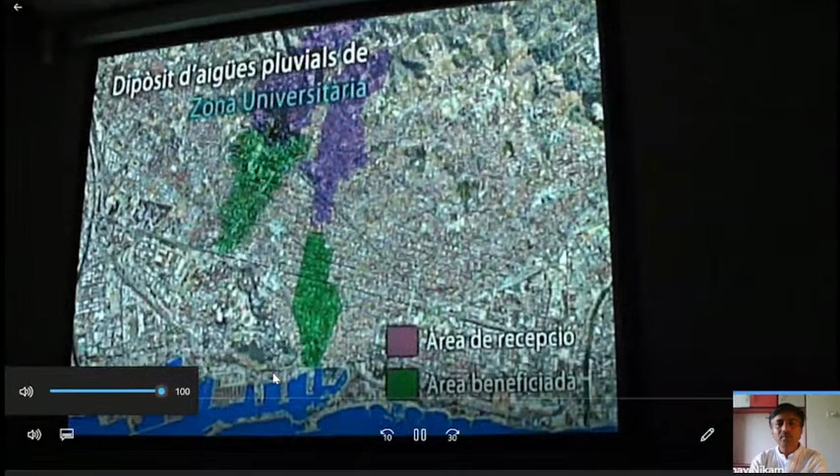The water used for cleaning the tank comes from the water table. The Zona Universitaria regulating tank is the largest in Barcelona and the second largest in Europe.

Its specific purpose is to regulate the flow. The football field area below has been converted into a holding pond, and the car parking areas below were converted into a very huge holding pond.

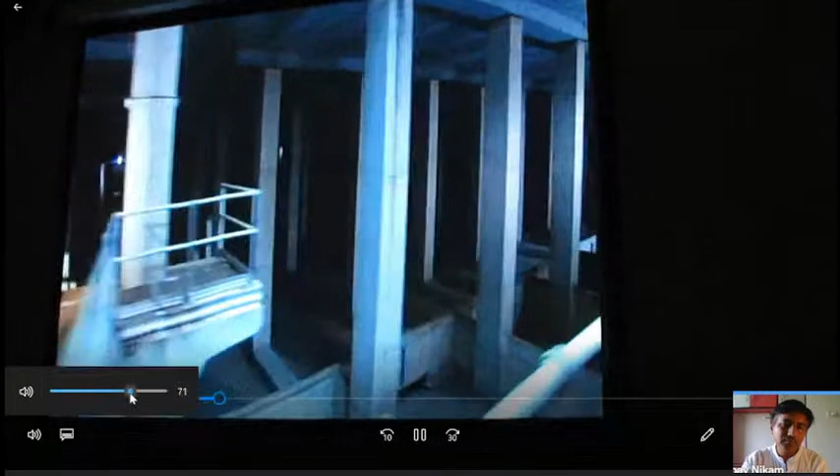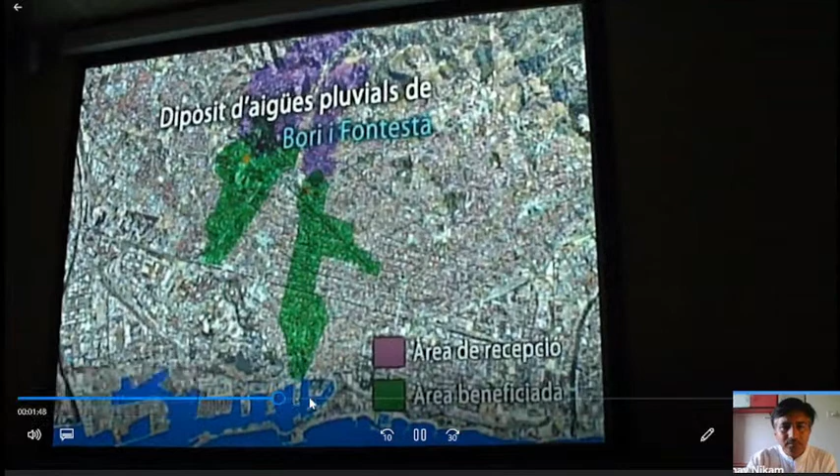Among other functions, the local control center regulates the cleaning of the tank with water from the Barcelona subsoil. It serves to alleviate filling capacity. This is again another example of the Bori i Fontesta tank.

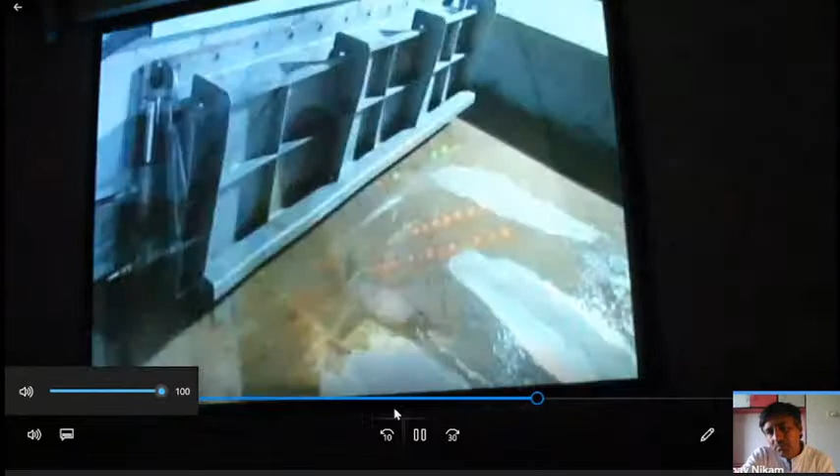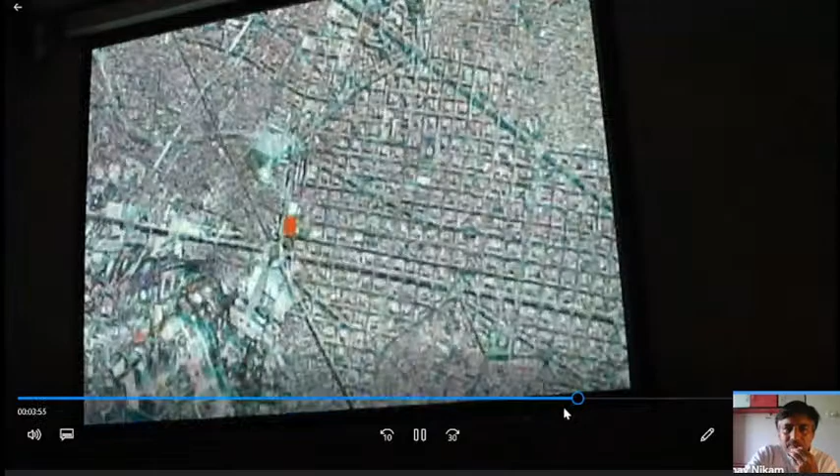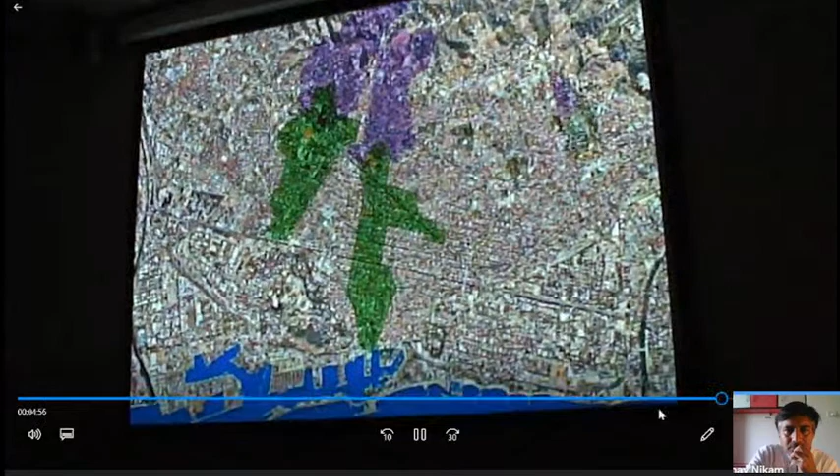Due to that, over 100 Olympic-sized swimming pools. By the time the storm hits the city, so this is what we have seen in the video. Thanks to Professor Kapil Gupta for sharing the video for this presentation, because he has been to Barcelona and has seen all these systems, and that's why he took the photographs and video.

Even for Mumbai, we require this kind of detention or holding ponds. Of course, Mumbai has initiated this; they have already provided holding tanks at two places: one near Vile Parle, another at Saint Xavier ground, which is augmented with a few additional pumps.

This kind of system is required to take care of the climate change impact, whether it is a rise in sea level by 30 centimeters or 60 centimeters, because it is very, very alarming, and at the same time, increased rainfall intensity, especially short-term rainfall intensity.

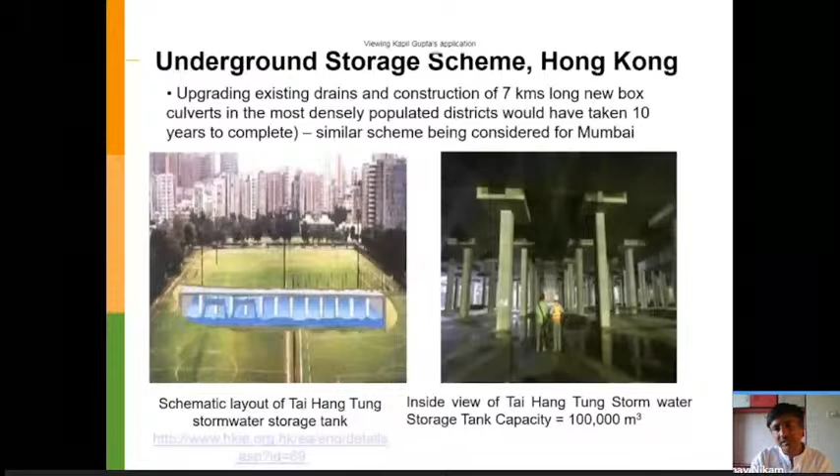Next question from Professor Abhijit Kamte sir: how to overcome the situation of flooding in areas like Dharavi? Dharavi is planning for tidal gates and also planning for a pumping station. Since Dharavi is already a low-lying area, their plan is to provide tidal gates, and since I have been studying the adjoining areas, they are also planning for increasing the drain width, the nala width.

Next question from student Mr. Vipul Survey: can we use permeable concrete in Maharashtra currently? Yes, you can use it, it's better. I've been recommending it for so many projects, especially data center projects, that they should be using pervious concrete.

The speaker Vijay Kulkarni is very much an expert who will be giving a talk on Wednesday or Thursday. He's a concrete expert and he will guide you.